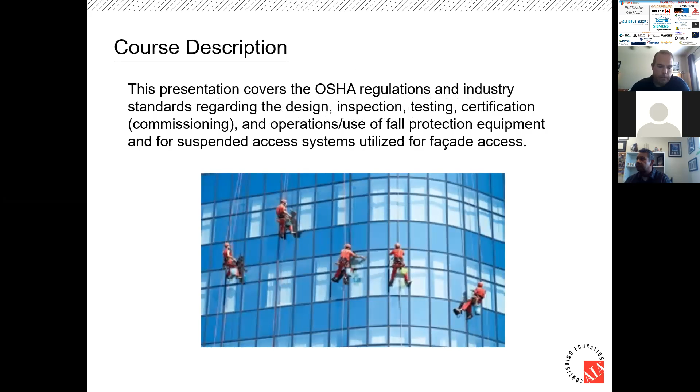When I give this presentation to my architects, because of their AIA requirements, we're required to go over the course description and present the learning objectives. Similar to today: federal regulations and industry standards regarding fall protection and suspended access equipment. I'll also touch on inspection, testing, and certification requirements of that equipment, as well as the various types of equipment you may see on your properties, and what's required of ownership—you as facility or property managers—as well as user requirements.

That could also be you as well. If your building engineers are using these fall protection systems on your building, you are the users. In other situations, your user is going to be your contractor or vendor coming on site to gain access to the roof or wherever this equipment might be.

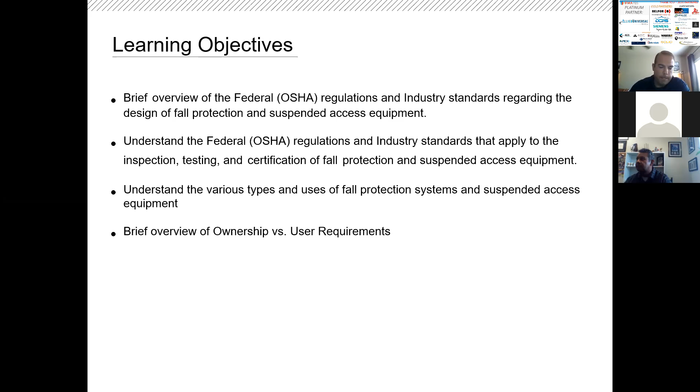So my first question, just to get everybody warmed up and involved, is: does your property or facility have some type of fall protection or suspended access equipment currently installed that you're using annually? We'll take a minute or two to answer just quick yes or no.

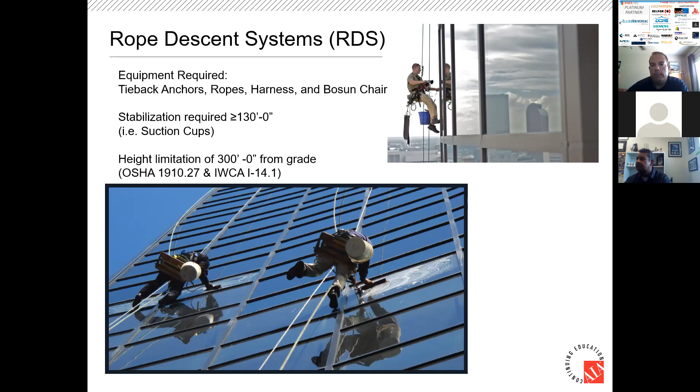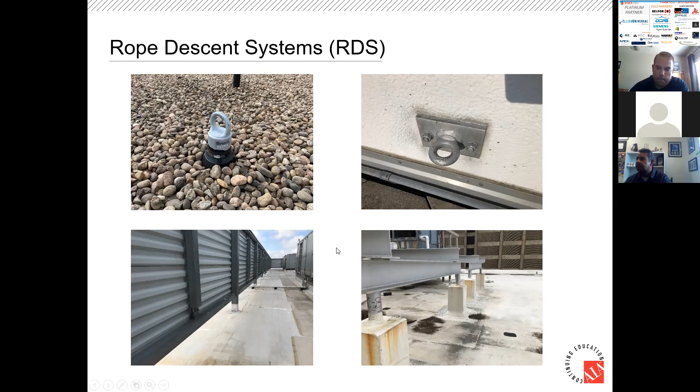When you deal with a rope descent system, there are some specific things that we need to look at as a consultant, an engineer who does this type of work. When we go out and look at a property or look at the anchor layout, we want to make sure that it meets certain requirements that allow for proper rigging, safe and proper rigging.

Because in OSHA 1910-27, OSHA states that the RDS, the system, must have proper rigging. And it's kind of a vague term for OSHA, right? It just says proper rigging, it doesn't tell you how to do that rigging. That's obviously up to the window washer. When I say rigging, we're talking about how they're tying their ropes from one anchor to the adjacent anchor, and how they're getting all their equipment in line and rigged up to drop over the side.

So the I-14 standard, again, that's a standard we discussed that came out in 2001. The I-14 standard is the only standard that addresses particularly the layout of anchors used for RDS. How specific and how these anchors should be laid out is addressed in the I-14, and that's the only standard out there that does that.

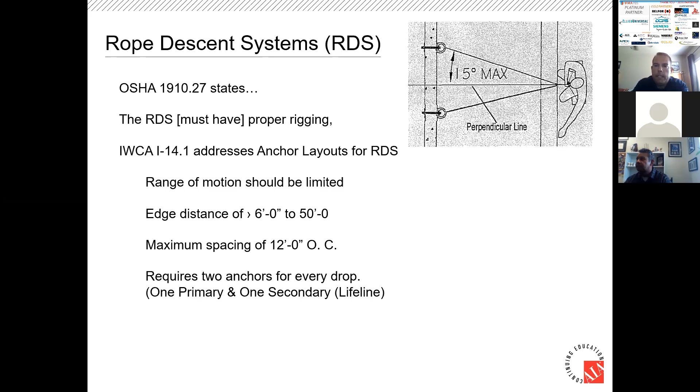So when I go up to a roof, when I tie off to my anchor next to me, remember when I make a drop, I've got to use 2 anchors, and those anchors need to be side by side or relatively close. They can't be more than 30 degrees apart, but they also cannot be more than 12 feet on center. So what we're doing here is controlling what I call the swing angle. We're limiting the range of motion for the worker. I'll show you what I mean by that in the illustrations that I have here.

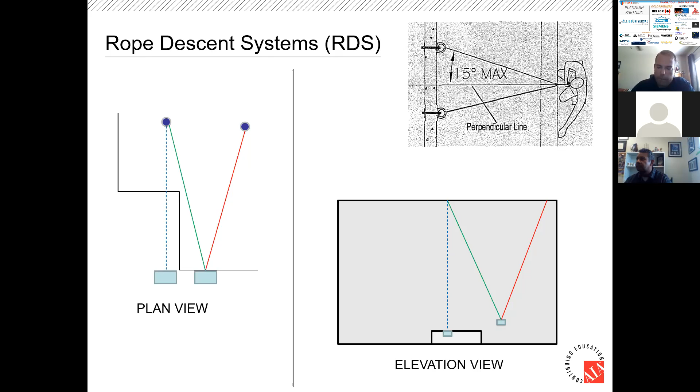So when we went out and saw this building, we saw this layout, and we recognized the amount of equipment — or lack of equipment — on this building. It became apparent that in order to do proper rigging, in accordance with OSHA 1910-27, we needed to add anchors to this building.

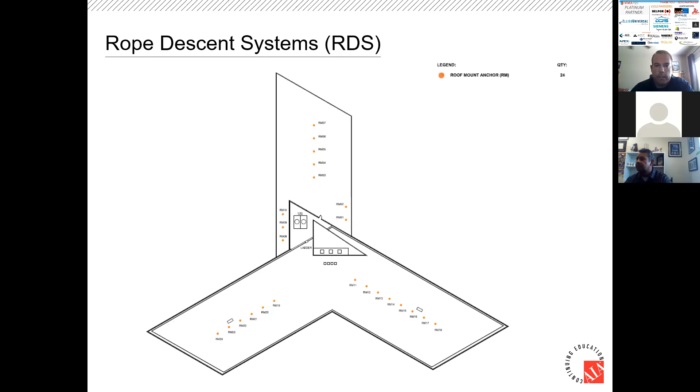But essentially, what I want to drive home to you guys is the difference: this was what the client had, and they thought they had a compliant layout that met OSHA requirements. But once we got on site about 1.5 years ago, we quickly realized they did not have enough anchors to have safe and proper rigging, which resulted in the addition of the anchors you see here. Those were installed last March on the building.

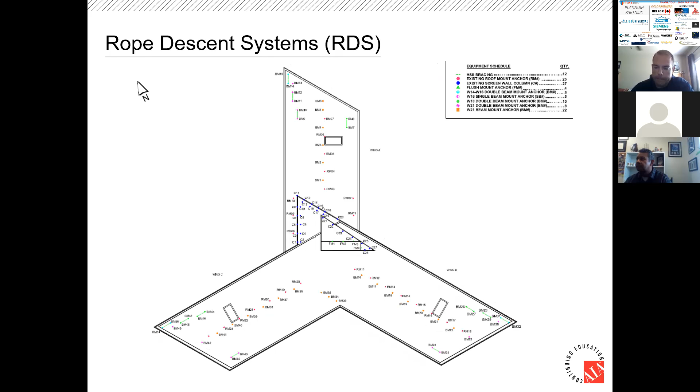So before I jump into suspended access, are there any questions dealing with rope descent systems before I get into the powered platform stuff? All right.

So again, we mentioned that rope descent systems, RDS, are typically the cheapest, most economical way to clean your building, but there are limitations. For instance, if your building is over 300 feet, you cannot do RDS. But there may be other situations, even with a low-rise building, where you need suspended scaffolding or a powered platform — when the work simply cannot be done off of a bosun's chair or being suspended from ropes, requiring workers inside a stage working side by side. And there are ways to do this if you only have roof anchors on your building.

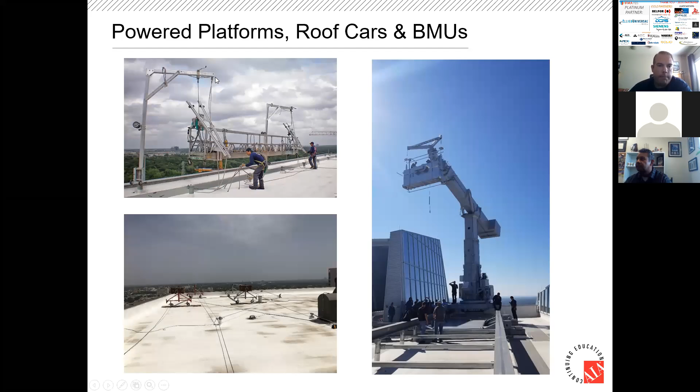That is an OSHA requirement. If your davit arm has more than an 8 foot 6 inch reach - meaning the short leg of the L, if this boom sticks out more than 8 foot 6 inches - it's considered a permanent davit arm, and it must stay out on the roof. It cannot be transportable. It must stay locked to its base, and it simply lays down on the roof when it's not being used. For most cases that's avoided for many reasons. But if you do have a permanent arm, it's because it's over 8'6" and it has to stay fixed to the base. Other requirements of a portable davit arm: if it weighs over 70 pounds...

We see this a lot, particularly out in Denver with some of the older equipment systems on the building. When a portable davit's over 70 pounds, it has to have wheels. This is to facilitate transport from one location to the next. And it can't weigh more than 300 pounds when fully assembled.

We talked a little bit about ground rigging and roof rigging. There are some differences there, in that ground rigging cannot be done over 130 feet without stabilization - we'll show you a picture of that on the next slide. This power platform is basically a large swing on the side of your building, a large pendulum. The more the depth of the drop or the height of the suspension, the more unstable this platform can get. It's a large swing essentially on the outside of your building.

So OSHA has some ground rules you have to follow when you do ground rigging or roof rigging. When you're 130 feet or less, you do not have to stabilize your platform. This means essentially your steel cables go all the way to the ground 130 feet, and they support the stage, and they can bring it up to the roof or to your level at 130 feet. Once over 130 feet, if your contractor chooses to do ground rigging, you have to use continuous stabilization - that's usually a track system.

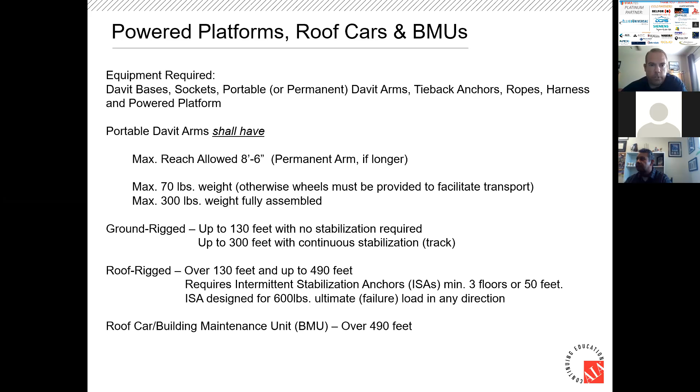But these are strategically placed where the drops of the suspended scaffold are going to go, and then you tie yourself in as you come down. This little steel lanyard lassos around the main suspension cable. There's a detent pin with a male connector that connects into the female receptor of the building anchor, and then this lanyard gets tightened up. That's what keeps the cable from swaying back and forth across the front of the building - that's your stabilization to keep the platform from getting out of control on a windy day.

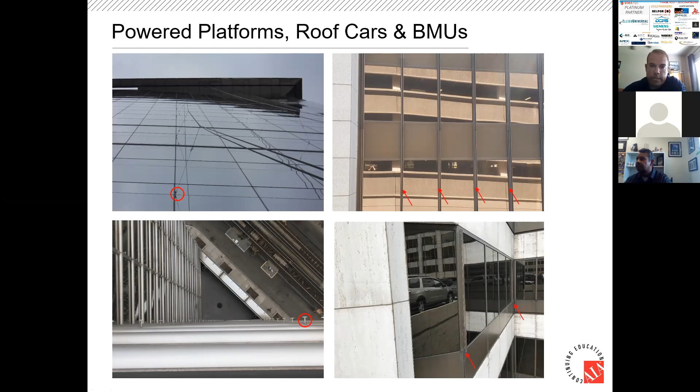Whereas with these other methods on the left side, we're tying in intermittently, every third floor as we come down the building. On the right is another version of a stabilization system. This mullion actually sticks out and engages the platform as it comes down from the roof, located in strategic locations at each end of the platform. So that's your stabilization for powered platforms.

Polling question 2: now that we've covered RDS and suspended access methods, what method is used most often to maintain the facade of your property?

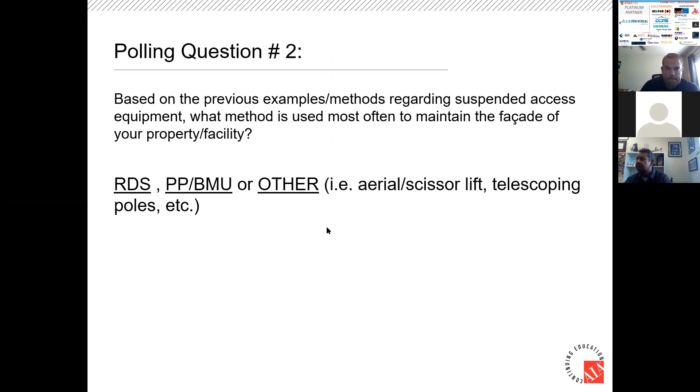We covered the equipment and the methods for building maintenance, for window washing particularly. Now I want to talk a little bit about fall protection equipment. The anchors and davits and all that used for suspended access are all part of fall protection equipment. But there may be cases on your building, like the few that answered the poll, where you don't do RDS and you don't do powered scaffolding to maintain it. Maybe you have a horizontal lifeline or a vertical lifeline system on your building for gaining access to some areas because of fall hazard situations. So I want to go over those equipment types and the federal regulations and standards as well.

Fall protection equipment in general is covered under OSHA 1910-28, the duty to have fall protection as an employer, and also under 1910-140 for personal fall protection systems. The standard behind those two regulations, where a lot of that comes from, is the Z359 standard.

So why do we need fall protection? A lot of times we're on a low slope roof, or really any type of roof, approaching an unprotected roof edge. Unprotected meaning it does not have a parapet at least 39 inches, or a guardrail at least 39 inches tall, that could prevent someone from falling over the side of the building. That's what we mean by an unprotected roof edge or unprotected edge.

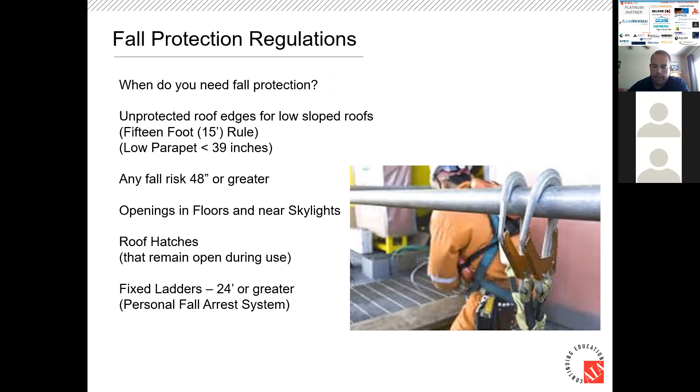One thing I wanted to point out is, when dealing with unprotected roof edges, in 2017, when they revised this fall protection regulation, OSHA actually put a number on when you have to have fall protection. Previously it was always kind of understood that if you were working within 6 feet, some people said 8 feet, of the edge of the building, you needed fall protection. OSHA never really defined that number until a couple years ago. Now, if you are working within 15 feet or closer to an unprotected roof edge or fall hazard, you are required to have a fall protection system in place, whether active or passive. So keep in mind, 15 feet, I call it the 15-foot rule. That's now the boundary. 15 feet or closer, you have to have fall protection. It's not 6 or 8 feet anymore, as other people used to use.

So there are types of fall protection systems: active and passive. Active systems are fall arrest or fall restraint. Again, these are all fall protection systems, and the verbiage describes what the system particularly does. A fall arrest system is designed to protect a worker from actually hitting the level below, so we arrest the fall, we stop the fall. In a fall arrest system, it is actually stopping or catching the person in the air once they have gone over the unprotected edge. They have basically fallen, and now we're stopping that fall and keeping them from hitting the ground below. That is a fall arrest situation.

A fall restraint is another type of active fall protection system. But in a fall restraint, we are actually preventing the worker from reaching or being able to step over or fall from that unprotected edge. This is accomplished typically by using a fixed lanyard or fixed rope, so that when the worker gets to the end of the lanyard or the end of travel of the rope, there is no more available distance. They cannot take a step further to step off the edge of the building. So we're actually restraining them, tethering them back from ever being able to fall. That is called a fall restraint situation. Both of those systems are considered active fall protection systems.

So question number 3: when accessing a low slope roof, whether it's active or passive fall protection, it's required for any personnel when working a minimum distance of how many feet from the roof edge? So now if you're working on a low slope roof, the minimum distance in feet before you have to have fall protection, is our question here.

All right, so the 4 that answered correctly - 15 feet is the rule. So good job on that.

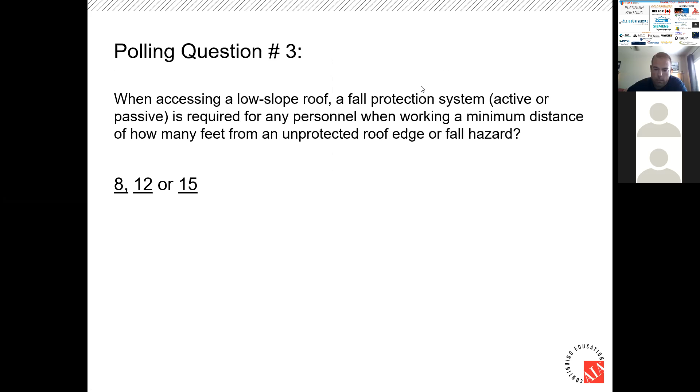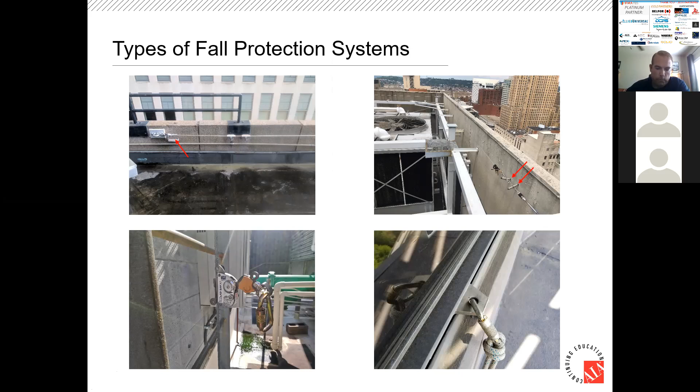That answer the question? Yes. Okay.

All right, so what I wanted to point out on this next slide is very important if you have a cable system.

This actually came up recently with a client, one of my clients in Florida - kind of had to educate them a little bit on cable systems. It's a new project; a contractor installed a cable system and basically called ATS to come out and certify the system and say that it was good to go so they could turn the building over to the owner and allow them to use it.

What we found out as we dug into the system that was installed is that they do not have the proper height clearance to use the system.

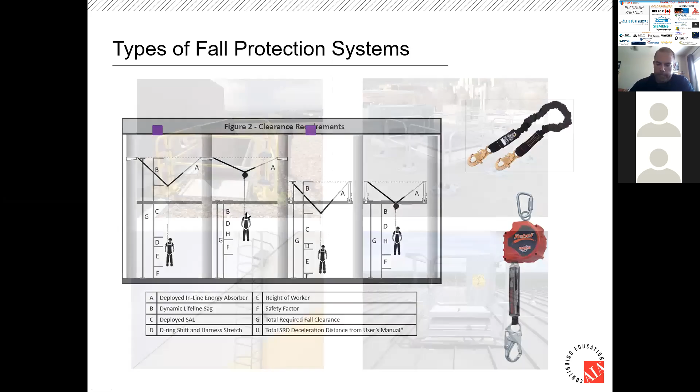The other situation, we have a self-retracting deceleration device, or some people call them a self-retracting lanyard. This is the device on the far right, at the bottom. This device works completely differently than the device at the top. The SRL, self-retracting lanyard, or self-retracting device, SRD, works very much like a seatbelt in your car.

This has a coiled up cable inside. As long as you're not making sudden movements or jerks, this cable will come out freely, just like the seatbelt in your car when you fasten it every time you get in. If there's a sudden movement, jerk, or a fall, a quick jerk in this cable system, it's designed to lock up like your seatbelt and prevent the cable from extending any further out of this housing.

With these types of devices, your clearance requirements are a lot less, as you can see in the pictures. The two purple scenarios show what happens if this cable system is installed using a lanyard, and the minimum clearances you need for that. Meanwhile, with the deceleration device, some people call these yo-yos in the fall protection industry, this situation and the last one are possible, and you can see the clearance requirements are a lot less.

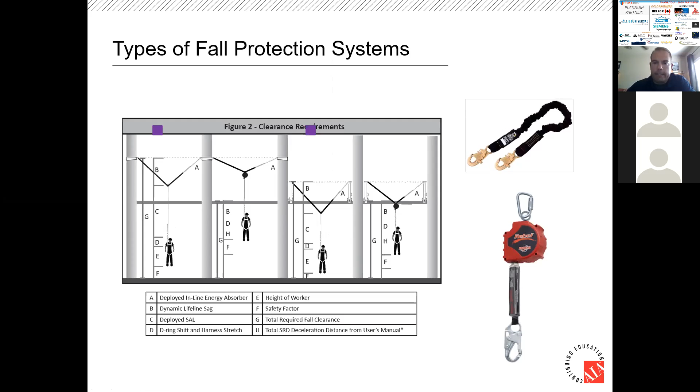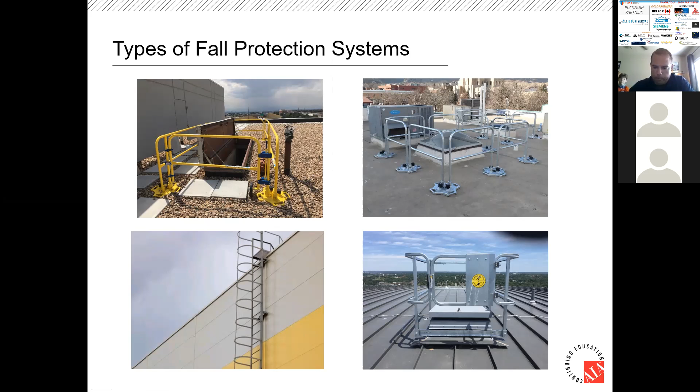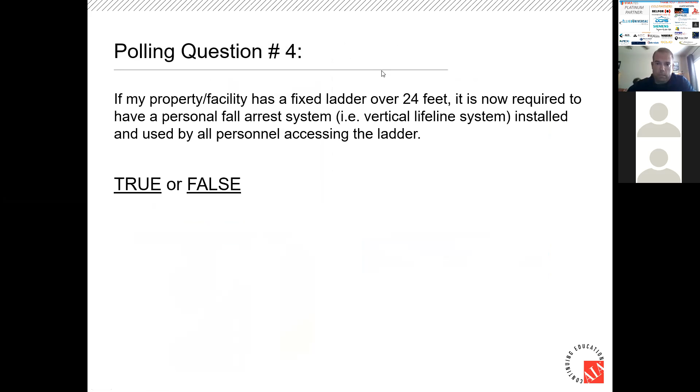Our fourth question, and I just gave my answer away here, but hopefully I drilled home to you guys that, again, if you're over 24 feet, you do need that vertical lifeline system. I think everybody seems to be getting that question.

And then we get into, just briefly, I'm not going to get through all the technical jargon of the design of the equipment. Just some things that you guys as property managers, facility managers, building engineers need to know. When you deal with personal fall protection systems, there's the anchorage of the system, this is where the cable anchors back.

It's where that cable anchors back to your structure, but that anchorage needs to be designed for 5,000 pounds. That's an ultimate, or I like to call that a failure load. And that's if the system is not designed by a PE. This is for a cable or a horizontal lifeline system. It could be a rigid rail system as well. But we're addressing fall protection systems, not suspended access equipment.

If a PE is involved, the system can be designed for a safety factor of 2 to 1. And then, of course, whenever you have a fall protection system, there should be a tag on your system, and we look for this when we come out and do your annual inspections.

The manufacturer's tag should list the type of system. In other words, is it designed for fall arrest or fall restraint? How many workers are allowed on the system at one time? There may be some other information as well, but those are the two main things we want to know or we're looking for.

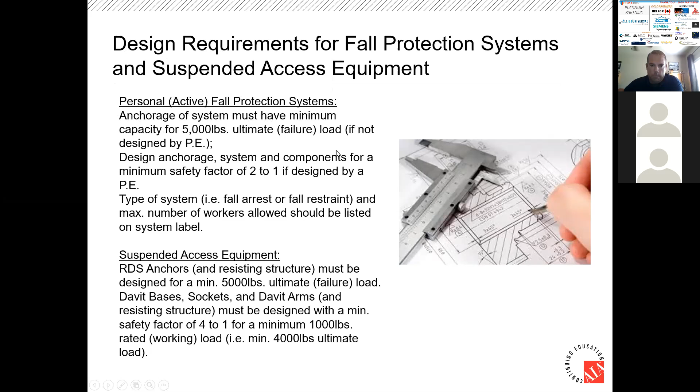Any questions on the design of the equipment? I don't see any. Okay.

So when you have all this equipment on your building, hopefully you guys are all aware that you're performing annual inspections. OSHA requires that all of this equipment be inspected annually, at least once a year, before any contractor or window washer uses it.

You should have an initial certification on file with the property that shows the equipment has been load tested and certified. Typically, we like to see that done by an engineer, or at least under the oversight of an engineer, with a stamped report by a professional engineer.

Every 10 years, OSHA requires that load testing be reevaluated, which is called recertification. So every 10 years, or if you're re-roofing around the equipment, you need to do load testing after the equipment work.

When we do load testing, we're typically load testing the tieback anchors to 2,500 pounds. That is half of the ultimate or failure load they're designed for. This is actually a prescriptive test method from the ASME A120 standard that we use as a guideline. It's also in the I-14 standard as a prescriptive method for testing roof anchors.

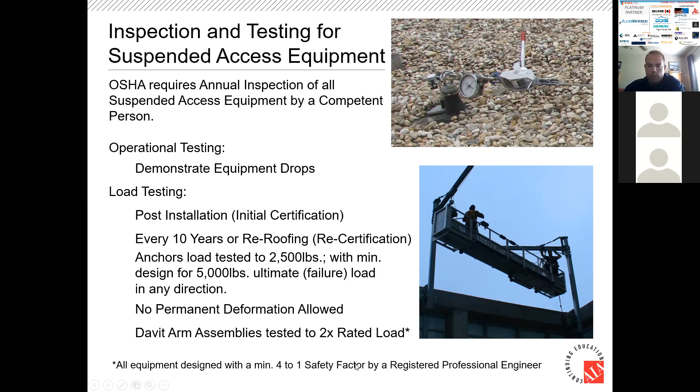With fall protection systems - your cable systems, horizontal lifelines, vertical lifeline systems, active fall protection systems - they are also required to be initially tested and certified, again under the direction of a professional engineer. They're also required to be visually inspected daily before use, but also documented for an annual inspection, as required by OSHA and the standards.

The Z359 fall protection standard recommends that load testing and recertification be performed at least every 5 years, no more than every 5 years. It could be more frequent if specified by the design professional who designed the fall protection system. But in no regard should it be more than 5 years between recertification and load testing of an active fall protection system.

Dealing with some terminology here: personnel using personal fall protection systems should be properly trained and competent. There's the terminology of a competent person - someone who's been trained or has the experience, which is knowledgeable.

Then there's a qualified person, one who has been recognized with a degree or professional certificate and extensive knowledge. Keep in mind, a competent person can use the system - a competent person has to be trained to use the system. But the system should be designed by a qualified person and should be inspected and certified by a qualified person, which, again, our recommendation would be a professional engineer.

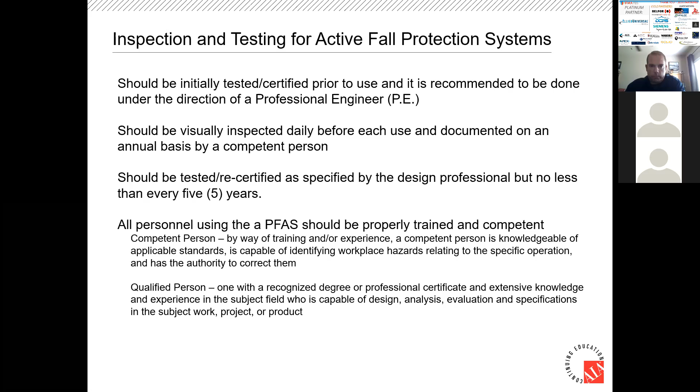Just some things we do for inspection and testing methods. For the typical annual inspection, it's typically visual. There's also a sounding inspection that we do. Visually, we're checking for corrosion, loose bolts. We take a rubber mallet and actually strike the equipment - we strike the davit base or the tie-back anchor.

Different equipment will emanate certain sounds. We listen to those sounds as we go from one piece of equipment to the next. If the sound changes, that's usually a sign that something's different, and it usually red-flags things that we want to take a closer look at or investigate more closely. That's typically what's done for our annual inspections.

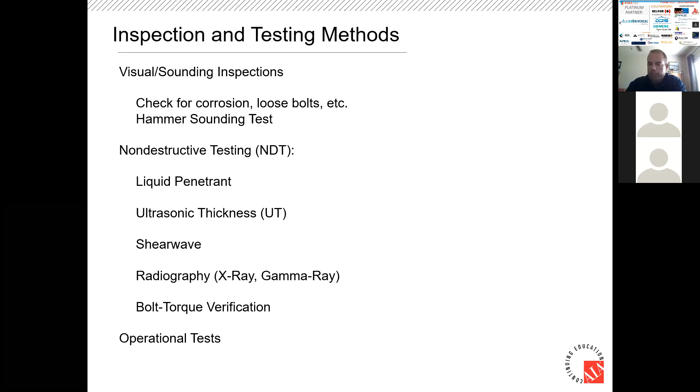Again, if we find something that raises a red flag, we may recommend additional non-destructive testing. Those can include checking welds using liquid penetrant and ultrasonic thickness testing, bolt torque verification to make sure any bolts, nuts, and connection hardware have been torqued properly, and sometimes with powered platform equipment, like BMU type stuff, we're actually doing operational tests as well.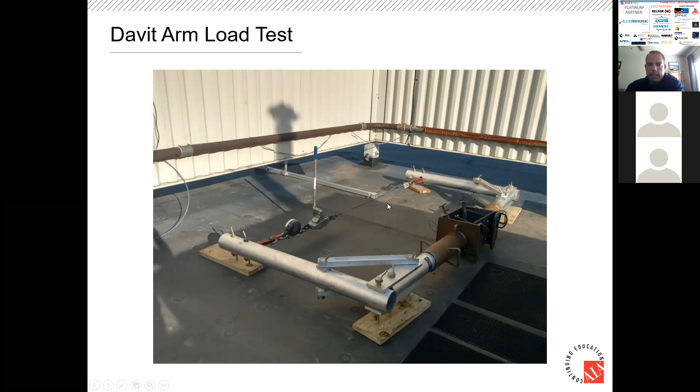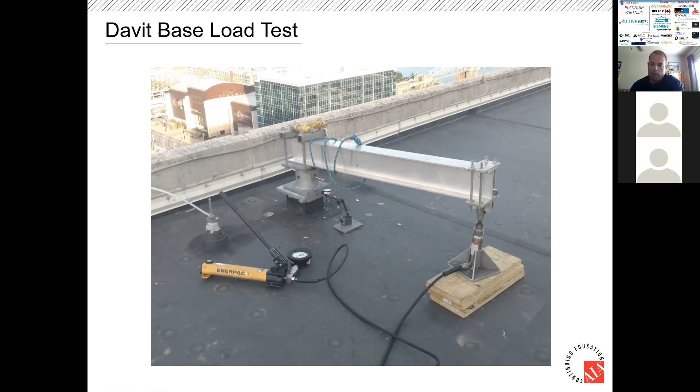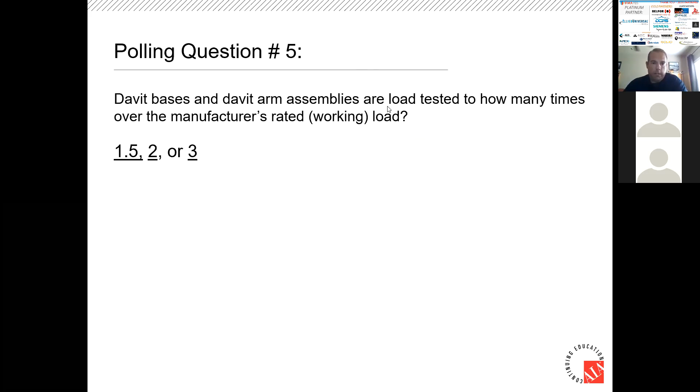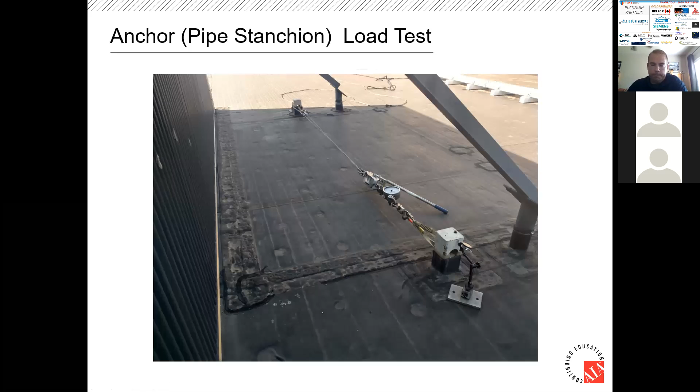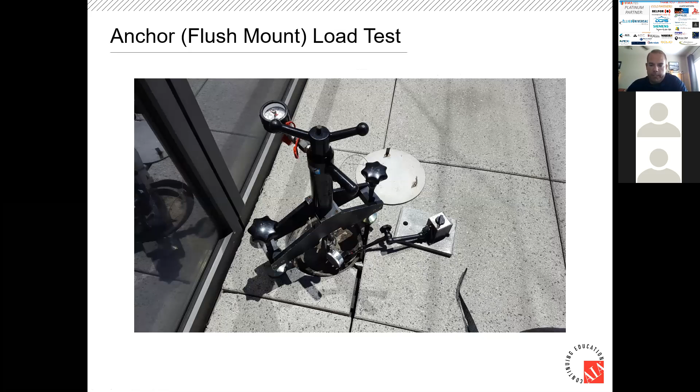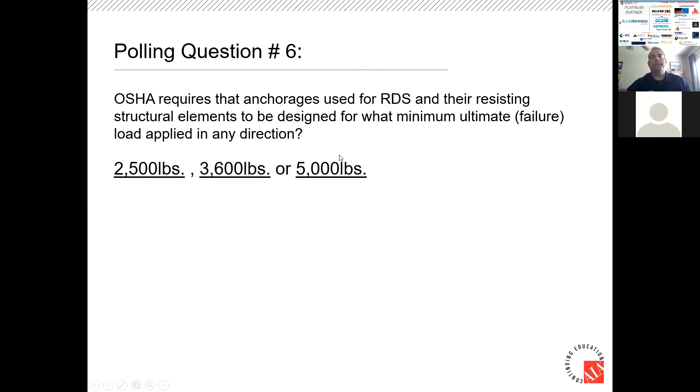So if you have a single anchorage point on your building that is used for fall protection, not rope descent systems—for fall protection only—there is a chance it could have been designed for 3,600 pounds by an engineer at some point during that equipment being installed or designed. But again, if it is used for RDS, specifically to suspend a worker for building maintenance over the side of the building, it has to be designed for a minimum of 5,000 pounds. So I just wanted to point that out.

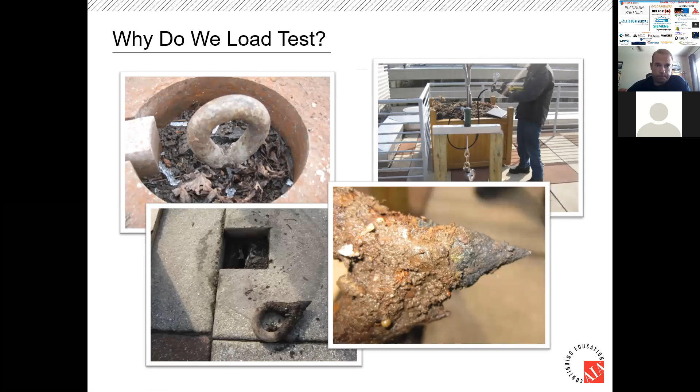To bring this to conclusion, some things are required by ownership. When I talk about ownership, the building owner or property manager, these are records you should have and keep on record with the building. You need to maintain your initial certification report, which can go back as far as 10 years, since every 10 years you're going to recertify and load test the equipment. So you should always have a certification report showing the last time the equipment was load tested and certified by a PE.

Specifically, OSHA states that if you are using anchorages for RDS, in the RDS regulations 1910.27, they state that the building owner has to inform the employer—in this case the window washer—in writing that they have identified, tested, certified, and maintained each anchorage capable of supporting 5,000 pounds in any direction. And again, that has to be done every 10 years.

Some other things you need to maintain that a lot of property managers don't know about are the records of the equipment themselves—for instance, the manufacturer's operating and maintenance manuals. There's a lot of information in those manuals describing how the equipment should be set up, and inspections that should occur daily, monthly, and certain routine inspections that need to happen.

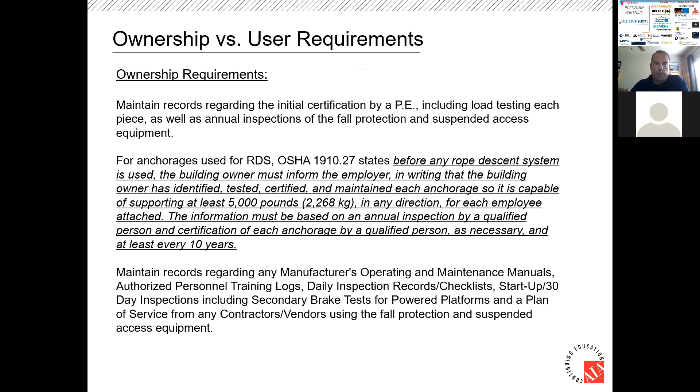So for the user, and again, the user in this situation could also be yourself. If you're the building engineer who uses that cable system to gain access to rooftop equipment or whatever to do your daily job, you need to be listed somewhere as an authorized person trained to use that system.

So again, whether it's the building engineer or the contractor coming in, they need to become familiar with the manufacturer's operating and maintenance manuals. They need to make sure they're listed on the training log, that there's a log there that says they've been trained and their name is on it. They need to be aware of daily inspections and what's been going on in the past. It's always a good idea to look back at the last week or two, look at the notes, and see what other users of the system are finding or noting before you use it.

Here's another one, this plan of service. The plan of service is very important, and this is a requirement that OSHA says you need to have with your documents. It's developed by the contractor, or in this case the window washer. It's essentially how am I going to access the building facade or the areas I'm going to clean, what equipment am I using, how am I attaching to that equipment. It's also a roof map that lays out specifically what drops around the building perimeter and what equipment I'm going to tie off to. It is a cookbook, a descriptive plan of how the window washer is going to accomplish his goal of gaining access to maintaining your facade.